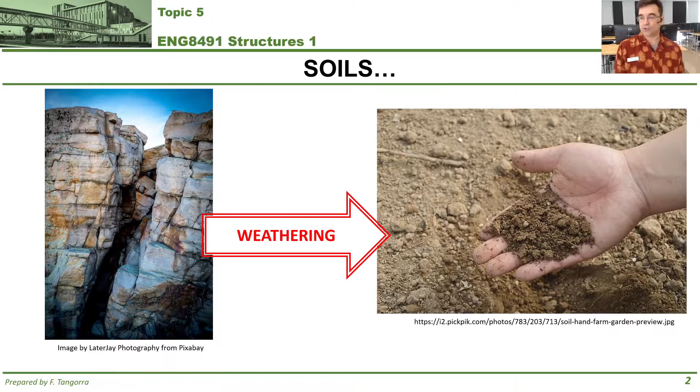Well, to get really to it, soils is really the weathering of rock, and usually rock is in the form of mountains and so on. That kind of weathering can be chemical or mechanical, and it reduces the sizes of that rock to smaller or slightly larger particles. At this point, one big distinction I'd like to make you aware of is this.

Soil can be distinguished, the solid part of soil can be distinguished into two broad categories. Coarse grain soil, which is soil made up of particles greater than 0.075 millimeters in size, kind of like the gravel you see here. And then you also have fine grain soil, which is soil whose particles are smaller than 0.075 millimeters.

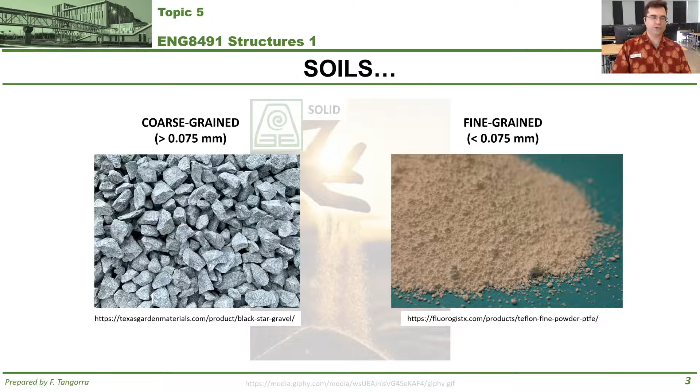But here's the thing: soils as a construction material are actually not as simple as you would think at first glance. Soils, in fact, are made up of more than just the solids we think of, like I'm showing on the screen here. Soils are actually considered some of the most complex construction materials, and that's because when they're used and considered for construction purposes, they comprise also water and air. It is solids, water, and air that make up soils as we know it as construction materials.

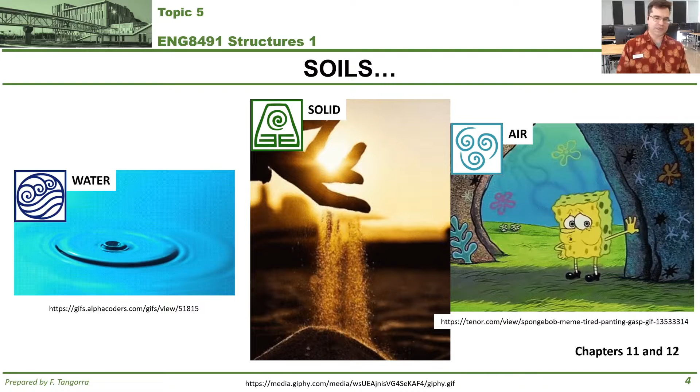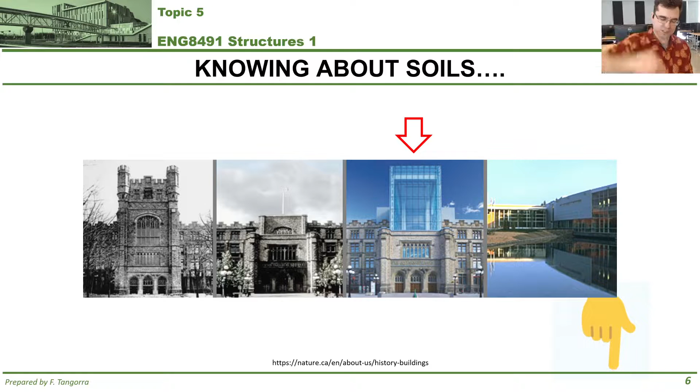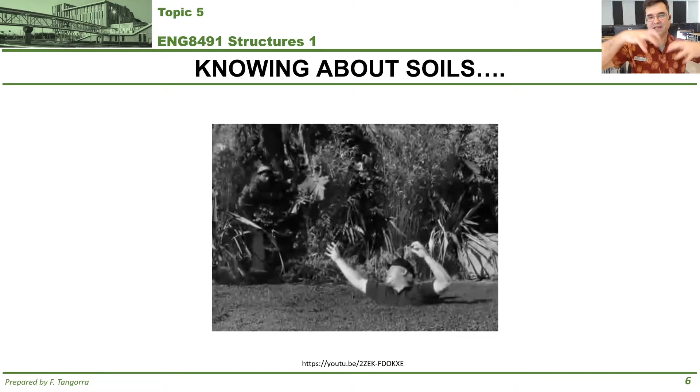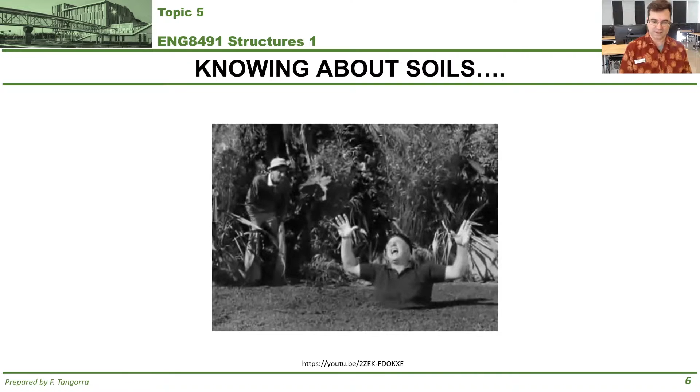What I'm trying to get across when it comes to soils is this: soils are important because they are literally the base upon which you build any of your structures. You want to prevent the soils you build upon from becoming quicksand, like I'm satirizing with this video posted for you on the screen. This is an image of how Hollywood depicts quicksand and how it affects humans - a fictionalized view where you sink in it. You don't want that to happen with buildings, because that would be - this is the technical term - really bad. Knowing about soils will prevent catastrophic failures to the buildings and structures you design, and hopefully this lesson will cover that a bit.

The purpose of a geotechnical report is that it allows those who carry it out to gather information relating to the properties of the soil on the site where you plan to build. They are also there to investigate whether or not there are any contaminants or pollutants present in that soil. The report would also include aspects associated with the excavation of the soil.

So making sure that if you build in that soil and dig it up, you figure out what the soil slopes need to be for stability purposes. It also figures out what the water table is, the level of the water, and takes soil samples while you're on site at various depths to assess the properties of various soils. It also helps figure out how much soil may settle after construction - after you put a building in there, how much that may or may not settle.

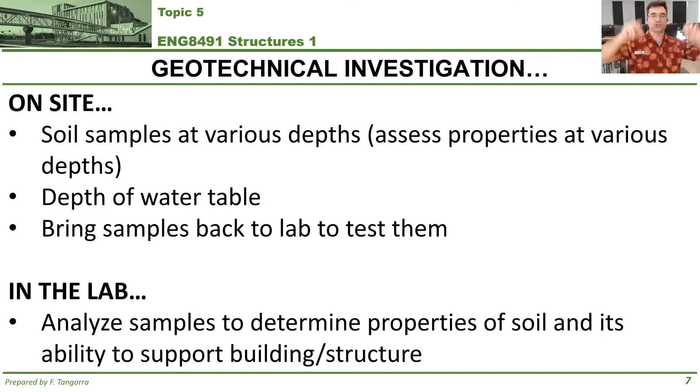It also provides recommendations on whether or not to even build there, because if the soil is so poor that you can't, then maybe you can't build, or if you do plan on building, the soil needs to be taken out and engineered soil put back into place. So recommendations on how to replace soil, how to reinforce soils, and recommendations on what foundations and footing systems to use. All the soil samples taken on site as part of the geotechnical investigation may also be taken back to a lab so those samples may be analyzed further to determine the properties of the soil at that site and its ability to support the structure you want to put in place.

Now, some of the ways that you do your on-site investigations are shown for you on the screen.

I'm covering 3 of them. The first one is test pits, and as the name suggests, it is really just that. You basically make a big hole on site, and these are probably the best way because they provide a large enough hole for you to do a visual inspection of the soil and to get samples of the soil. You get to see it right there because you get in the pit and take the samples. It's considered probably the most reliable method because it allows direct inspection and assessment of several properties of the undisturbed soil. Typically, they're less than 8 feet deep, so that's one of the limitations because you can't go any deeper than that, otherwise the pit has to be huge.

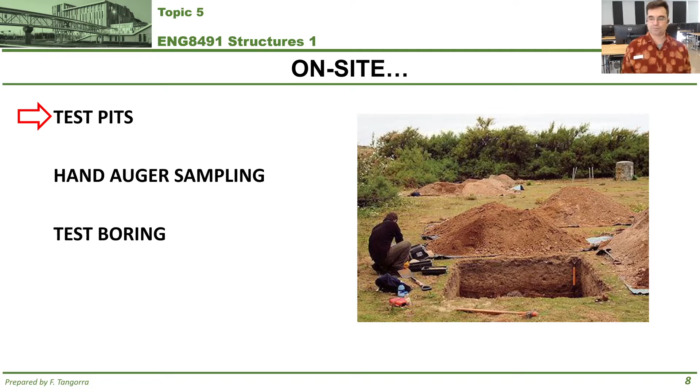It permits observation of the soil samples directly, and it may allow you to figure out the depth of the water table on that site, maybe, if you're lucky. But it does come with some disadvantages. Test pits are really expensive, especially if you have to make many of them, especially if you have to go deep, because the deeper you go, the bigger the pit has to be to prevent a cave-in of the sides of the pit. And if the water table is high, the test pit cannot be too deep. So if the water table is close to the surface, you can't go very deep with your test pit because you can't excavate. That's where, for example, something like a hand auger sampling method will come into play.

This is more common for small jobs, especially where visual qualitative inspections are required. Literally what you do is you grab what is a huge corkscrew and then screw that into the ground to a certain depth, then pull it out and inspect the soil that you're pulling out at various depths. That's what that is.

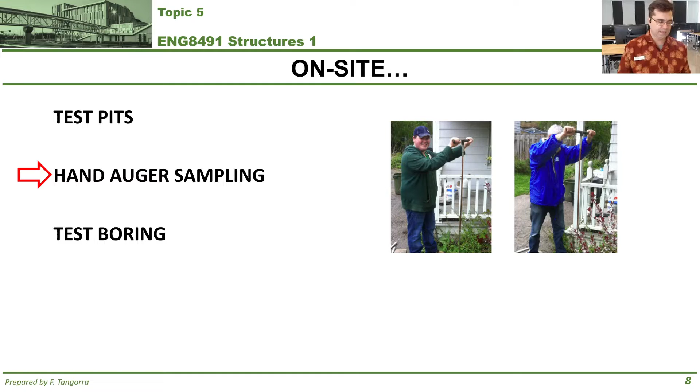The most commonly used method for on-site acquisition of samples and inspection of soil properties is the boring, the test boring, basically doing boreholes. This involves grabbing soil samples using a truck-mounted, power-driven hollow stem fitted at the end of this rig, which is typically drilled into the ground to various depths. It's great for going to very deep sampling, unless there is refusal, if you hit bedrock. Also, with this setup, you can go to a site and do multiple boreholes in one shot during the day, and it allows you to sample at various depths so you can bring those samples, those cores, back to the lab.

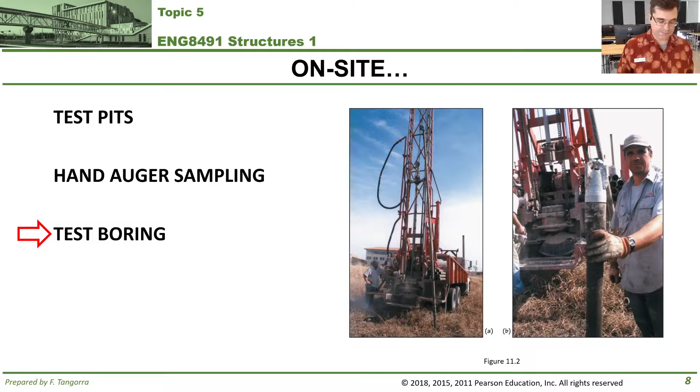Once you do the cores, those cores are able to show you the log, or I guess the profile of the soil where you're drilling, and that also allows you to create a log of the bores, or a borehole log, like the one that you see here, which I've taken straight out of your textbook.

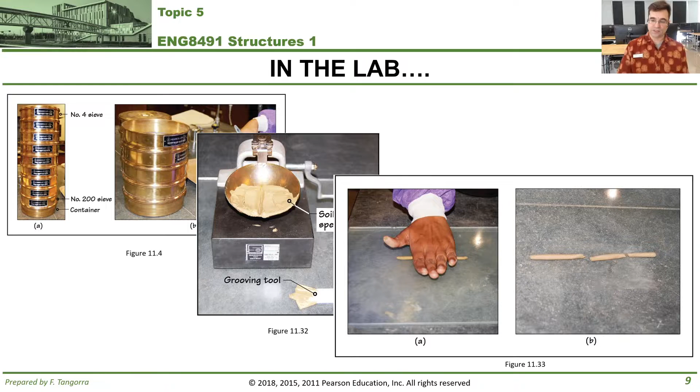Once you do something like this, you take your samples back to the lab and do various types of tests. I've taken these images straight out of your textbook, so that's where they're taken from. I will discuss these tests and link more to them in the description in a second video. But I want you to know I'll never test you on these specific tests. You should just be aware of what they are so you can converse with others in the field, or in your business, when it comes to relating to these soil tests.

When it comes to classifying the soil so you can figure out its properties for a job site or construction, the first big distinction is differentiating between coarse and fine grain material, like I'm showing here on the screen. Now, only separating between coarse material and fine material is not sufficient. You have to get a lot more detailed than just that. You can't just take the soil on site and say, I've identified the chunk that is coarse and the chunk that is fine. That's not enough. You have to do more than that. And how is this done? Why is it done?

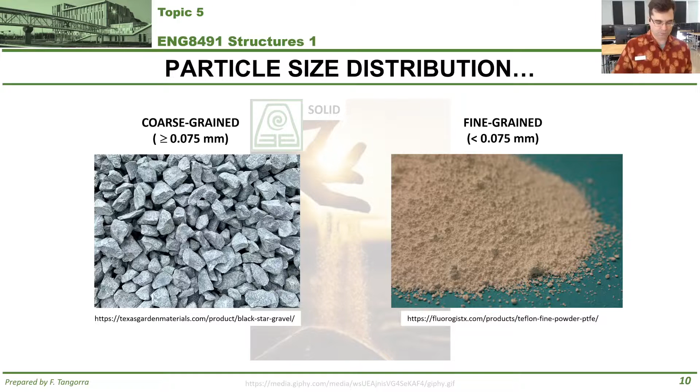As it turns out, if we know the soil composition for a sample, we know its strength. So if we're able to classify the distribution of the solid particles in a soil, we can actually estimate the strength of that soil. And if we know the strength of that soil, we know how much load it can support for whatever building or structure you're planning on putting on it. It's basically like a recipe, if you will.

The idea then, first of all, is to separate between the coarse grain soils and fine grain soils. This is done by using the testing you see on the left-hand side, using sieves. Basically, sieves are filters, meshes, if you will. The sieves at the top have meshes spaced far apart, and at the bottom, the meshes are spaced close together, so that larger particles are captured at the top when you pour the sample in, and the finer particles go below. This big separation at 0.075 millimeters is critical because it distinguishes between coarse grain soils and fine grain soils. The reason that's important is because coarse grain soils behave very specifically.

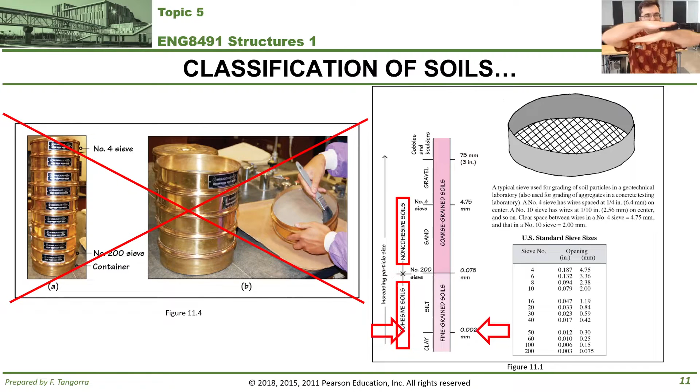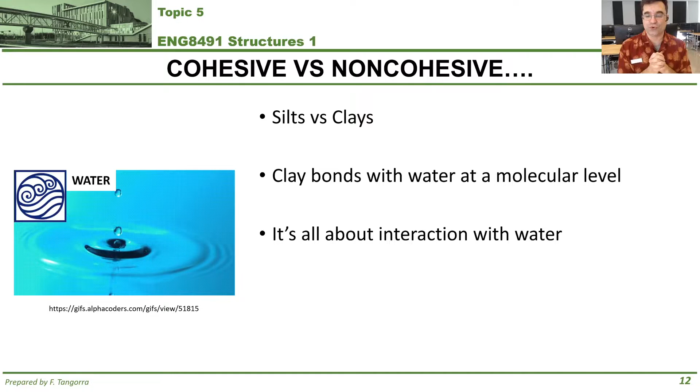Which gets us to cohesive and non-cohesive soils. Why do we care? Why is this threshold of 0.075 important? Because soils are not just about the solids, it's also about water. Don't forget, soils are made up of solids, water, and air. When it comes to fine soils, silts and clay, seeing how they behave in the presence of water is critical, because clay particles are so small and so shaped that they bond with water, interacting with it at a molecular level. So for these fine particles, it is about how they behave in the presence of water.

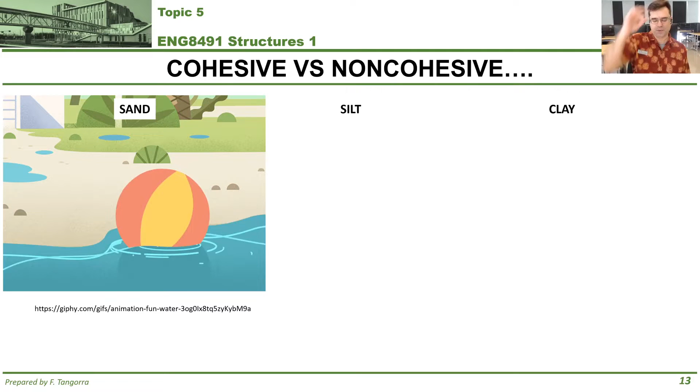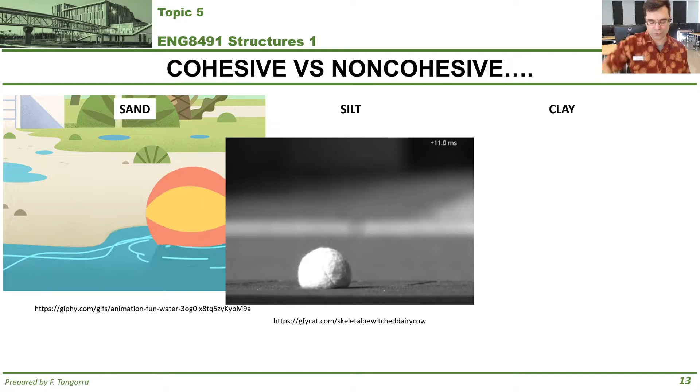So before I jump into explaining cohesive and non-cohesive soils, I want to give you an idea of the relative size of particles for sand, silt, and clay. Because some of these are so small, we have to use an analogy. If we pretended that sand particles were the size of a beach ball, then silt, which is smaller than sand, would be the size of a tennis ball. A beach ball versus a tennis ball, more or less. Which means a clay particle would be the size of a grain of rice. So you can start to see, if you remember how big a grain of sand is, bringing it down proportionally from a beach ball to a tennis ball to a grain of rice, that's how small clay and silt particles are.

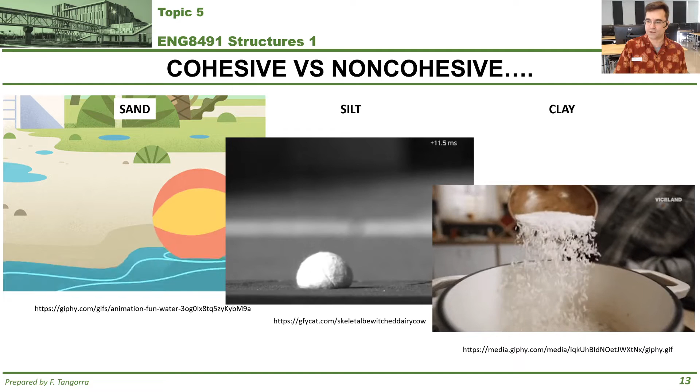Which brings us to this: cohesive versus non-cohesive. Cohesive material is the kind that, in the presence of water, sticks to itself. Silt and clay, when they get wet, tend to stick together — that's why you can mold clay to give it a shape. Whereas non-cohesive soils, in the presence of water, don't stick with each other. Gravel, when you wet it and put it together, still falls apart. It doesn't want to stick with itself when it's wet.

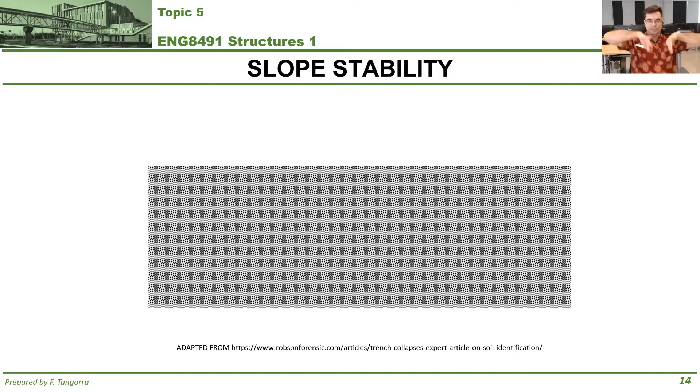This is important because, say in the case of excavations, knowing whether or not that soil is cohesive is important, because if the soil is cohesive in the presence of water, you can slope it at a certain angle. If it is not cohesive and you slope it too steeply, the sides of the excavation can fall in and hurt people. Let me give an example: if this were stable rock, you can cut it at 90 degrees and it won't fall into itself — it's solid.

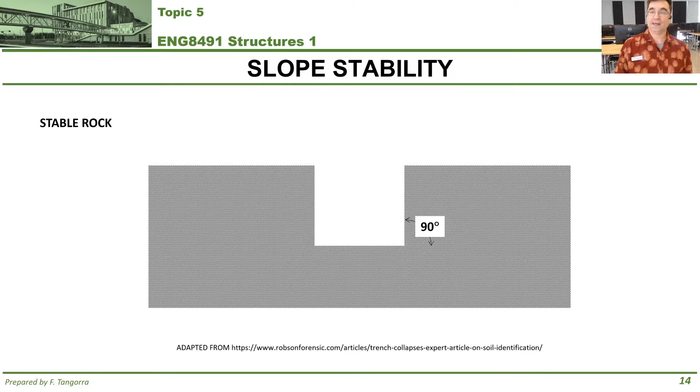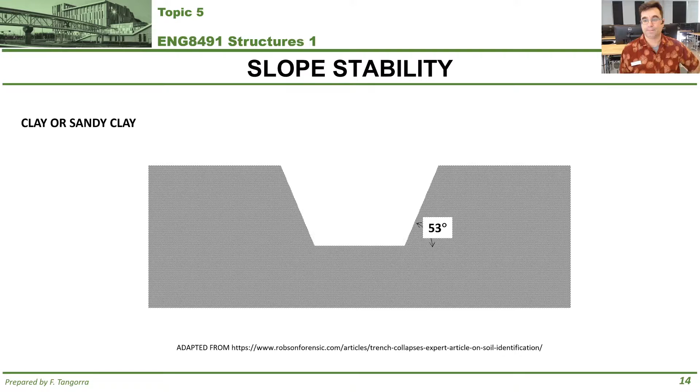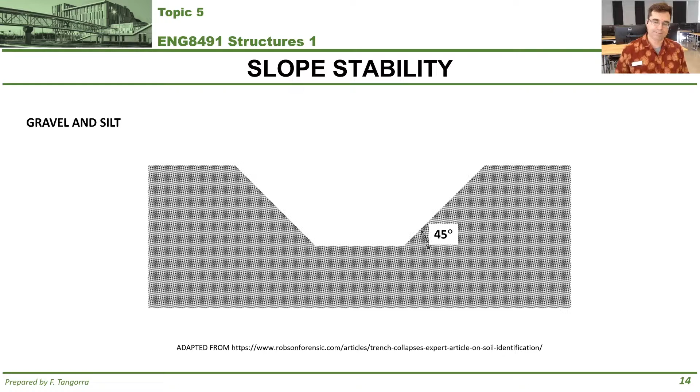Now, if we move on to cohesive soil, like clay or sandy clay, you can slope it as much as 53 degrees and it's still good. When you go to less cohesive soil like gravel and silt, they can go up to 45 degrees, no more — if it's more than that, it's dangerous. When you get to something like sand and dirt, it's non-cohesive, so the presence of water does nothing, and usually slope excavations stay at 34 degrees and no more.

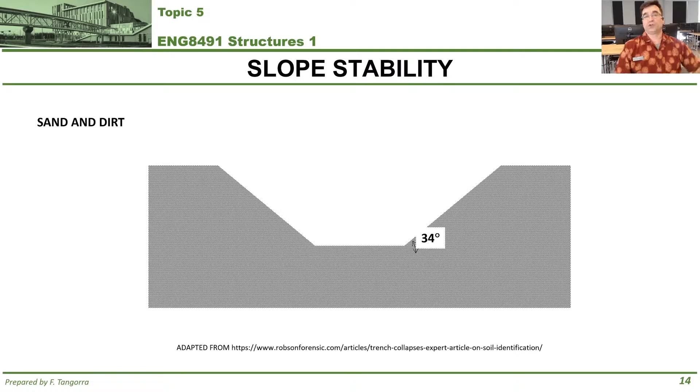Now I want to jump into the more details of the effect of water on fine-grained soils.

I want to remind you that the tests discussed in part 2 are for your information only. I'm not going to test you on the details, and you're not expected to know them since you'll never carry them out as part of your education. You may in professional practice, but that's beyond the scope of this course.

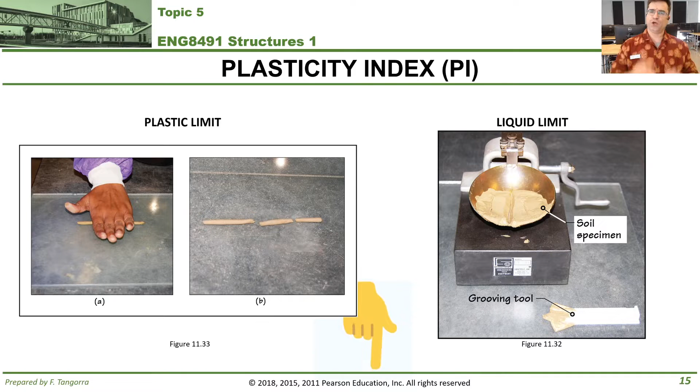So now, about the plasticity index. The plasticity index relates to something called the plastic limit and the liquid limit of soil.

Let's start with the plastic limit. It's the amount of water that needs to be added to a dry sample of soil to turn it into a putty-like substance—think semi-solid putty. It may retain some shape and support some load, but it's the amount of water that gets the soil to stop supporting most of the load, because it can then be shaped.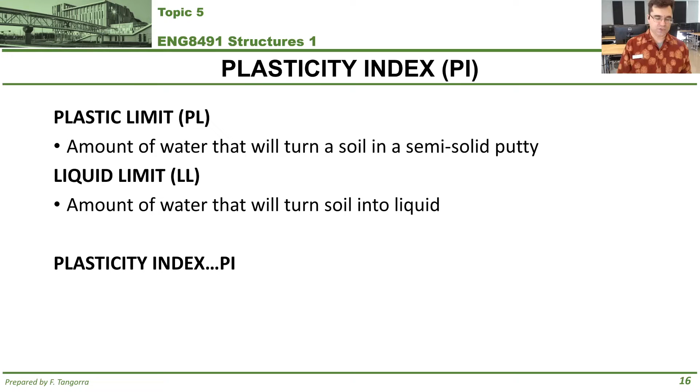The liquid limit is the amount of water needed to turn a sample of soil into liquid. I don't mean pourable, I mean the soil no longer retains a shape on its own and is no longer able to support any load—it's slurry. When soil reaches this stage, it typically results in catastrophic failures of the soil and whatever structure or nature is attached to it.

So then, what is the plasticity index? The plasticity index, PI, is simply defined as the difference between the liquid limit and the plastic limit. When I say amount of water for both, I mean the percentage of water by weight that needs to be added to a soil sample.

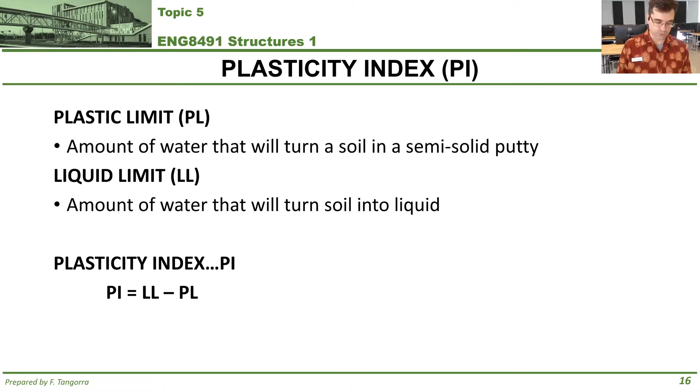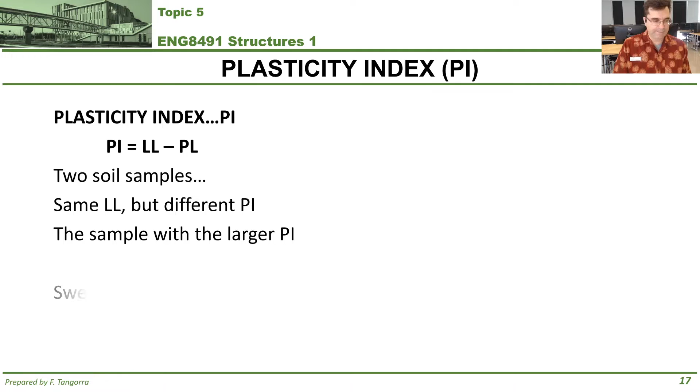Now, the interesting thing about the plasticity index is that it allows you to compare soils and identify their behavior. Say we have two soil samples where the liquid limit is the same, but the plasticity index is different. The soil sample with the larger plasticity index will be more susceptible to swelling in the presence of moisture and shrinkage when moisture is removed, because it can absorb more water.

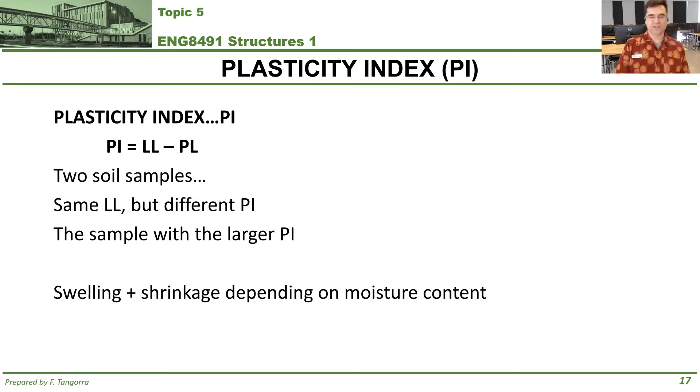This is true specifically for fine-grained soils, which are most susceptible to change in volume based on moisture content. So let's now discuss expansive soils—these relate to fine-grained soils that are susceptible to change in volume based on moisture content.

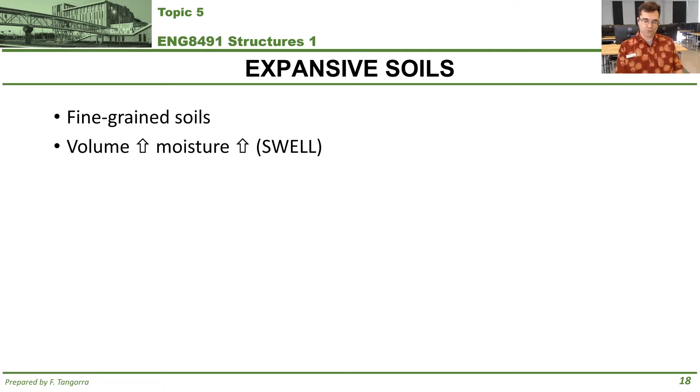When the volume of a soil sample goes up with the addition of water, that soil swells. When you take water away and the volume goes down, that's considered shrinkage.

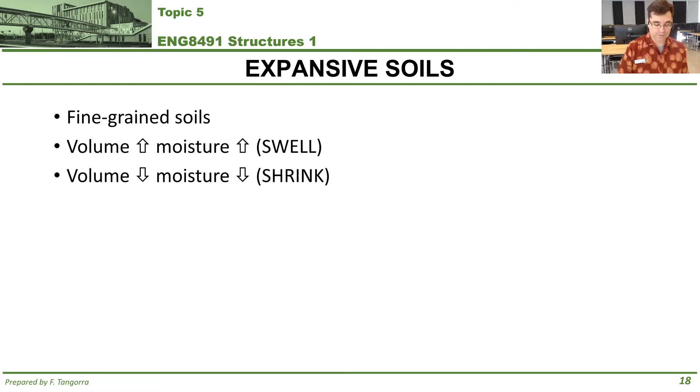More specifically, we get highly expansive soils when the liquid limit is more than 50% and the plasticity index is more than 30%. This is soil you have to be careful building on, because the presence of moisture causes big changes in the level of that soil—shrinkage or sinking, or expansion and movement of your buildings.

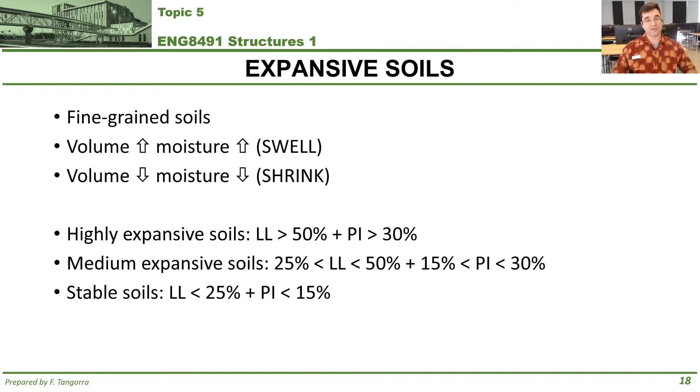Mediumly expansive soils usually have a liquid limit between 25% and 50%, and a plasticity index between 15 and 30%. Stable soils typically have a liquid limit less than 25%, and a plasticity index less than 15%. This becomes very important for figuring out the effects of moisture on soils, and therefore the effects of soils on the buildings they support.

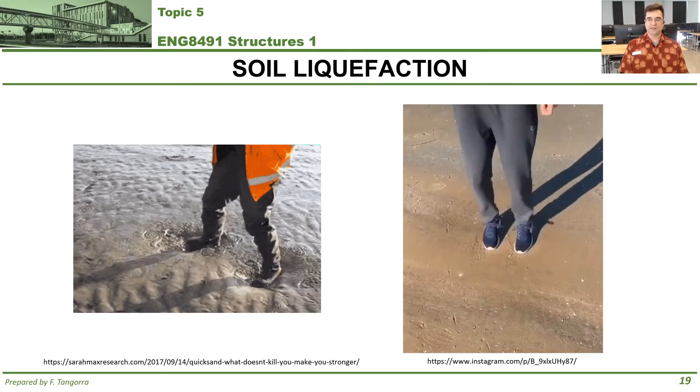Here we go—why? Soil liquefaction is one example. Soil is such a complex construction material that simply because it looks stable and solid does not mean it's meant for construction. I'm giving you two examples of soils that start off looking okay, but once you apply any load to them, they stop behaving as solids and behave more as liquids. This is the phenomenon of soil liquefaction.

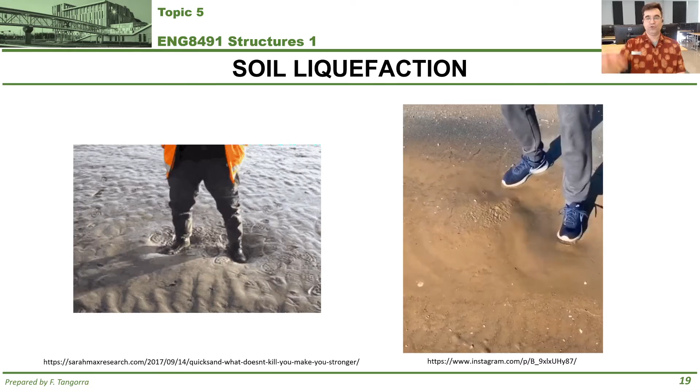This phenomenon is especially a problem in seismic areas because if you have a building built on this kind of soil and you have an earthquake, you're shaking the whole setup. And when that happens, the soil under the building liquefies.

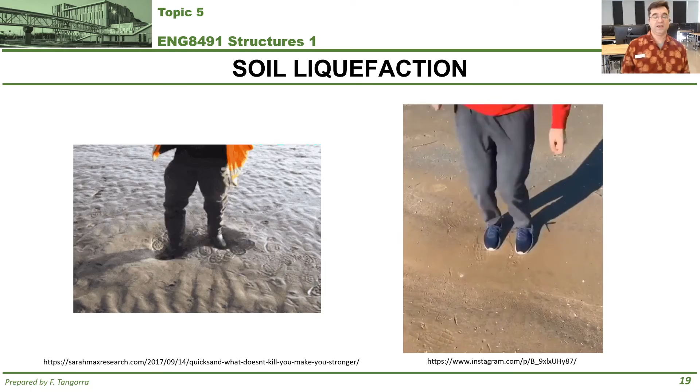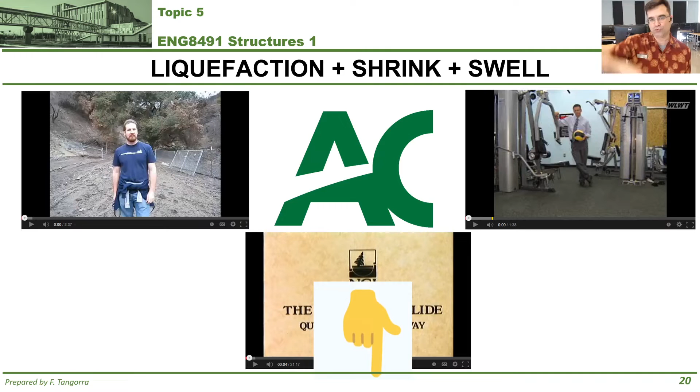Literally, it still looks solid, but it behaves like a liquid, and your building sinks in it and moves with it. It's catastrophic. I will link for you examples of soil liquefaction, effects of soils that cause shrinking and the settlement of buildings, the swelling of buildings, even how soil liquefaction has been studied at Algonquin College. They're all going to be in part 2, linked at the bottom.

This is important because assuming you do everything right, but if you don't do everything quite right, you can get different settlement of buildings. You can get no settlement of a building - that's great, you've done everything right. You can get uniform settlement, where the whole building sinks or moves at the same rate. Or you can get differential settlement, which is bad, the worst of these situations.

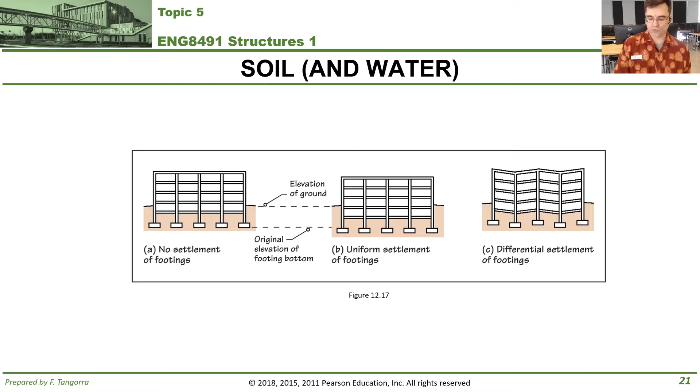But that's all this is about when it comes to soil, making sure you know the properties of the soil upon which you plan to build, so that if they're good enough to support what you put on it, you're good. If they're not good enough, you know, so you can respond to it.

Because really, this is the whole point. We want to figure out, for the soil we want to build on, what that soil's bearing capacity is. This is a term you need to make sure you know. Soil bearing capacity is the fancy engineering term for the strength of that soil - basically how much force it can take while still holding things up, which then influences the design and dimensions of the foundation walls and footings of your structure.

Because typically your footings and foundation walls are going to be made of very rigid material, definitely more rigid than the soil you're putting it on. So you don't want those foundations and footings to punch through your soil, which is usually softer. So you have to spread the weight of the building coming down to a wide enough footing so that it balances out with the strength of the soil under it.

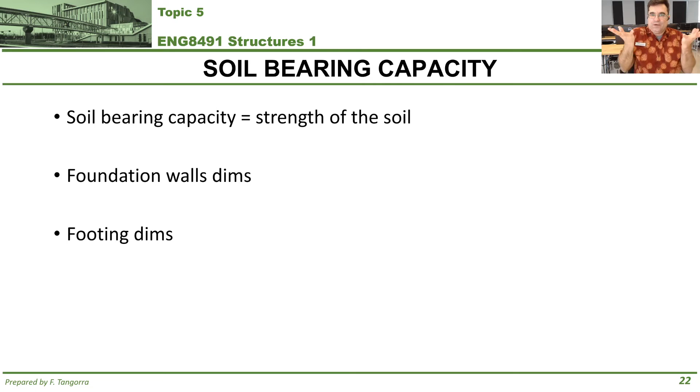Because you want to prevent this from happening, right? You don't want your building to sink as if it were in quicksand. In technical terms, this is really bad, and you don't want really bad.

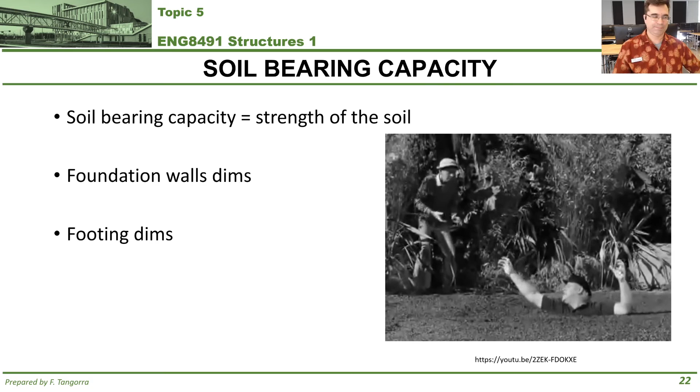I want to direct you, for your information, to table 9.4.4.1 of the Ontario Building Code. This is where we can find some bearing capacities of different kinds of soil. You should be familiar with this because we will be using these quantities for tests, final exams, and some examples I'll be covering shortly.

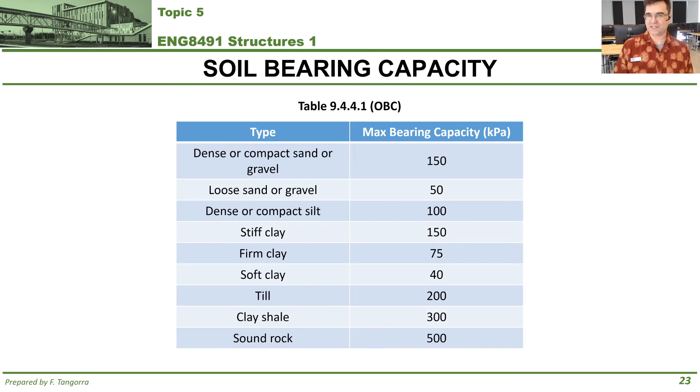Also, this methodology of figuring out the bearing capacity of different kinds of soils is a simplified way of doing it. It's based on the conceptual expectation from these different kinds of soils. It will be good enough for our purposes.

Which then brings us to this. I am going to cover 3 examples, all linked for you at the bottom. Example number 1, which you see on the screen now, is an example where we are going to assume that the soil under this pad footing is loose sand.

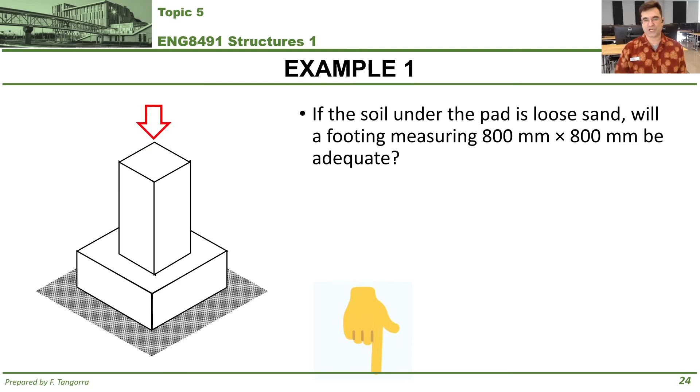We're going to assume that the footing measures 800 millimeters by 800 millimeters, and I'm going to give you a value of force coming down from the building above. We're going to be able to figure out with example number 1 whether or not this footing, sized as it is, is good enough. Check it out. Example number 1 is linked for you at the bottom in the description.

For example number 2, which is linked for you at the bottom in the description of this video, we're going to assume that this soil is loose sand, but it could be any other kind of soil from the table in part 9.

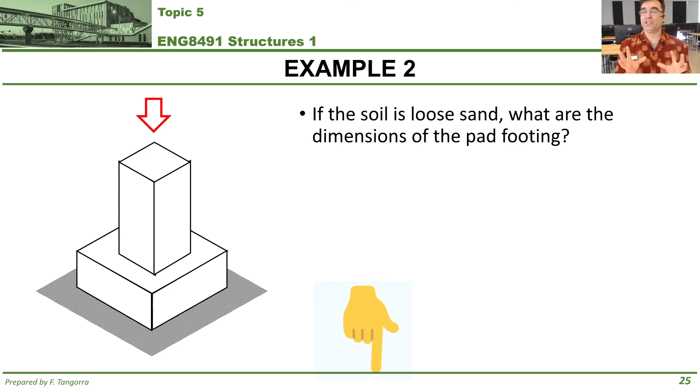And based on that, and a certain force that I'm going to be guesstimating from the building above, we're actually going to figure out, according to part 9, in a simplified fashion, what the dimensions of the pad footing are. Lastly, with example number 3, for this configuration, we're going to actually figure out what kind of soil would be expected to be under this pad footing given certain parameters. Example 3 is also linked at the bottom in the description.